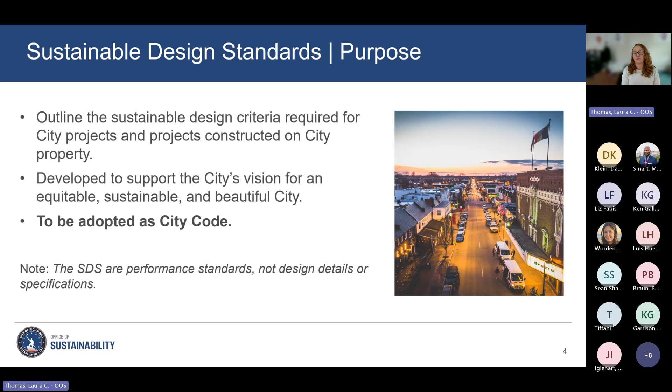Our office spearheaded RVA Green 2050, which is the city's climate equity action plan. And that document really comes out of Richmond 300 and is fully aligned with Richmond 300. So we spent a lot of time with RVA Green thinking about what an equitable climate future looks like for us. We've got our vision and our commitments through both of those documents. And so we really use those as the foundation for how we develop performance standards as it relates to sustainability and resilience.

If we're going to get to our greenhouse gas emissions goals, we've really got to move fast and far in achieving net zero facilities, for example, or ensuring we're maximizing our renewable energy installations, or reducing the amount of construction material, or recycling our construction material to a greater extent. So this is how we're developing these targets, and that leads us from that policy to that target, and then moving forward, we're looking at design.

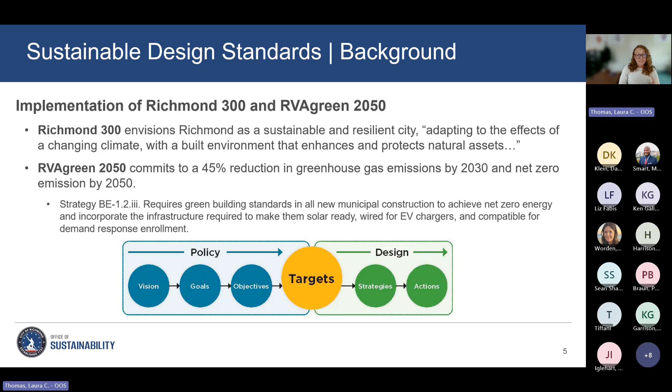So there's a question I see about applying to renovation or rehab projects or just new construction, and we do have that answer for you. Want to make sure we go through that. So specifically, this is for new buildings over 10,000 square feet. Thanks for the great setup on that, Margaret. So all new construction projects 10,000 square feet or above, these standards will apply.

It will also apply to major building renovations. So buildings that are over 20,000 square feet, if we replace 4 or more of any of these major systems, it's automatically going to kick into these standards. If it's 3 or less of these systems, it will not apply to major building renovations. It will apply to small project renovations between that 10,000 and 20,000 square foot.

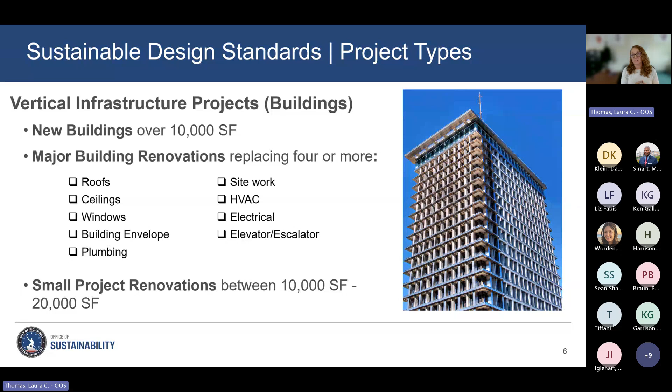It's also, so that's kind of our vertical construction application. If we think about horizontal infrastructure, that can mean a lot of different things. It's a little more intricate and complex to integrate horizontal construction projects into performance standards. So we'll share a little bit more about how that will come into play for some of our projects.

But generally, we can think about horizontal infrastructure projects in 4 different categories, or at least this is how the city has identified them. First, we're saying parks and community spaces. So automatically, any park or community space of $3.5 million or more will have to adhere to, we're going to be using Envision standards, the Envision standards that this document entails.

Right-of-way projects, any right-of-way project of $5 million or more. Same with outside the fence. So inside and outside the fence is kind of how we categorize various aspects of wastewater and stormwater construction. So how we're integrating those projects. So anything with those, that's the $5 million threshold. And then inside the fence, so like a wastewater treatment plant, you can't really certify a wastewater treatment plant as Envision necessarily, but if you're at $50 million or more, you're going to have to use that Envision framework.

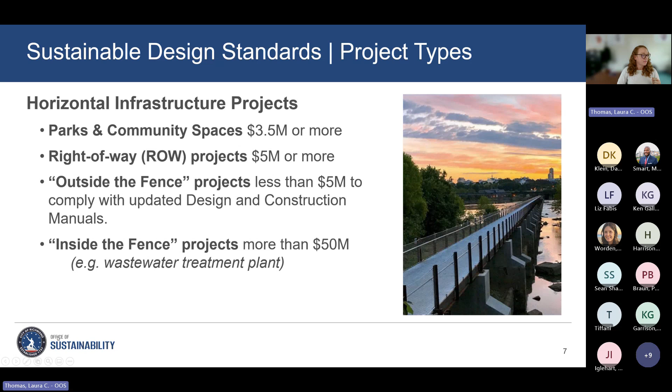So what are the exceptions? New buildings or renovation projects less than 10,000 square feet will not need to get certified. Emergency repairs won't need to get certified or look at these checklists, right? We've got an emergency out in the field from a public safety perspective. We really need to go out there and just fix things.

Utility maintenance and repair projects, so usually those are one-off and small to where having a whole checklist or getting certified isn't practical. And so in those cases, what we're doing is taking a look at our performance and best practices manuals internally as an organization and having conversations about those and how we make those more sustainable and resilient so that when we do go out, we're automatically incorporating some of those concepts rather than trying to focus on the small details and the teeny tiny projects. We're going to think about how we do those processes as a whole.

So small infrastructure projects are similar. Anything with less than 10,000 square feet of land disturbance tend to be things where you don't have that ability to do a big certification process or go through these long checklists if you're doing that small of a project. So again, just looking at our spec manuals and making sure those are updated more frequently. And then the small parks projects that are half acre in size or smaller will also be an exception.

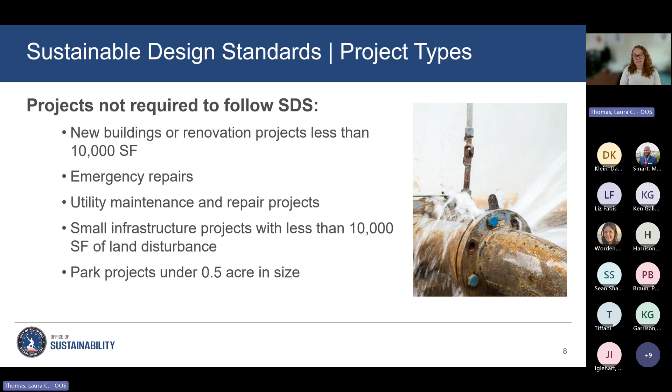So one thing that we think is really important is not just establishing performance standards, but changing the way we do projects. So what is the process in which we build and construct things here as a city? So we really wanted to focus on that process and think about the integrative process and how we incorporate that.

So at the very onset of a project, at the idea stage, you want to bring everyone to the table. Let's say we want to build a new building, a new department in the city, and they need a home, and we got to figure out where they go. Let's say we don't have any space at any of our current buildings, so we need to site a new facility somewhere within the city of Richmond.

At that phase, these standards require us to say, if we want to build on a new piece of land, then we need to engage with the community that is in that area or neighborhood. We need to ensure that's something they want, not just something we're placing somewhere within the city. Once we know where that site is, we need to bring all the stakeholders to the table to have conversations.

So we aren't just including project managers and designers, but our CMARs on board. Everybody from tip to tail is going to be in the conversation - our architects, our engineers, everyone on the construction side, the community as well. We're all engaging in the conversation simultaneously so we know how these systems and these complex built environment projects are coming together.

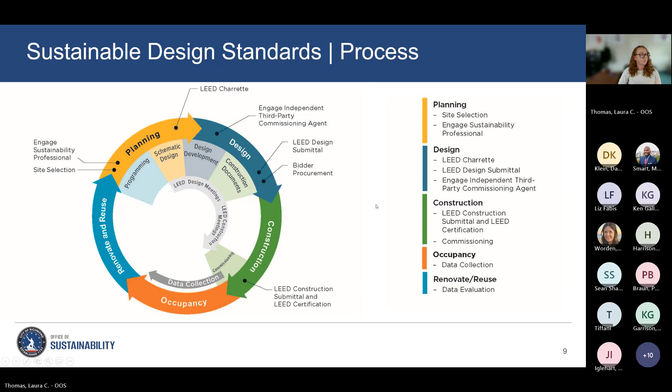Some of our outreach requirements, not on the technical side but still just as important, is reflecting the City of Richmond's equity agenda in this work. So really looking to empower the communities that have experienced these past injustices. That speaks to the land acknowledgement and the environmental justice side of things as well.

That outreach has to begin at the onset of conception rather than way far down the line when you've already spent money and time designing your project. So we want to make sure folks find out about these things early on and that they have the opportunity to participate in the decision-making process.

So next, we're going to look at some of the specific requirements that we have. These are more around LEED, so our vertical construction projects. Everything 10,000 square feet or more shall achieve LEED silver.

And we can always increase that in future iterations as we as a team get used to flexing this muscle around LEED and Envision - we'll get stronger at it, we'll get better at it. And if we update this document at a minimum every 5 years, we can look at increasing that silver rating. But we will require all of these projects getting LEED silver to achieve 20% of the location and transportation credits.

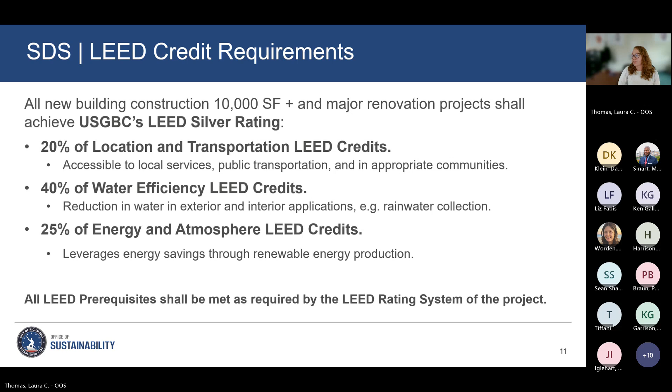We also are going to require that integrative process we spoke about to be incorporated into every project. Every new city facility will have EV charging stations. Every new project that is relocating will do a site assessment, and we are going to lean heavily into the energy and atmosphere requirement section for LEED as well.

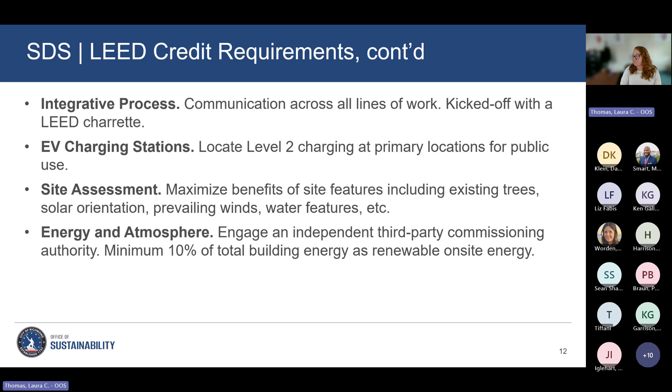And looking at that third-party commissioning and ensuring that 10% of total building energy is renewable on-site energy. We have additional requirements pushing us towards that net zero goal established in RVA Green 2050 as well, and we can look at that in a bit here. So those are on the LEED side.

Take a quick look at the Envision side. If you're familiar with it, the ISI's Envision framework will be used for all new horizontal infrastructure projects regardless of size.

Again, all projects will use LEED or Envision checklists. We shared earlier what the thresholds for actual certification are. That's $3.5 million or more for parks, $5 million or more for right-of-way, $50 million for inside the fence, and then outside the fence projects like repairing or replacing a stormwater pipe. Instead of focusing on the teeny pipe, we are going to go back and look at all the city design and spec manuals.

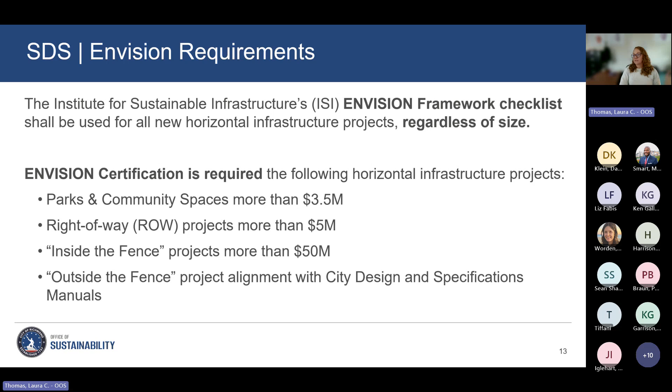So that was a lot of information. We're going to take a moment and pause, thinking about what we just shared. We understand why we're doing this, we understand how we got here, and we understand where different elements of LEED and Envision, and some things that go above and beyond in this checklist or these design standards, are going to be applicable.

So when you think about performance standards, I'd love for you all to share in the chat what kinds of elements you might want to see in this document. I want to see if maybe we already have some of those things included. For example, we shared the 10% renewable energy—do you want to see 100% renewable energy or net zero performance standards included here? Thinking about things like LED lighting and compliance with international dark sky standards, or what percentage of materials you want to see recycled during construction. Take a second, let's get a couple answers in the chat.

You can have elements related to stormwater or landscaping. A big one that comes up often is utilizing exclusively native plants, which we almost do. Ahead of the landscaping slides, I'll share that in addition to native plants, we want to allow some wiggle room, especially for larger species with long lifespans. We want to make sure they can adapt to and tolerate the increased impacts of climate change—increased heat, increased drought. When those trees are 100, 150 years old, we still want them to thrive in those increased conditions.

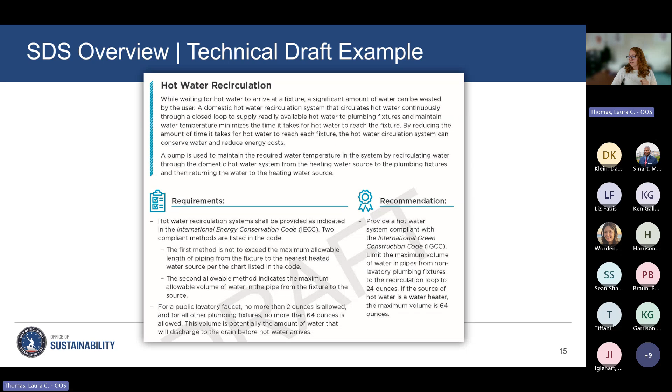The next one that we're going to go to is energy. So there are a lot of elements in the energy section. I highly encourage you all to go check that out in the Konveio link, and my team will pop that back in at this point. So if you haven't pulled that up, you can hop in and do that now.

But just an example in the energy section is the building envelope. So some general standards, but we want to make sure that every vertical construction exceeds minimum performance requirements by the amounts shown in this chart. And it depends on what kind of building it is. We ran a lovely net zero energy scenario modeler when designing and deciding what these are going to be.

Our consultant team, AECOM, who helped us create this document, they have a really great net zero modeler. And they took our performance thresholds, plugged them into their models based off of a warehouse, a dwelling unit, or an office and administrative unit, and helped us come up with these goals. So for example, if we're designing an office building, our exterior walls have to exceed minimum performance requirements by 15% or more.

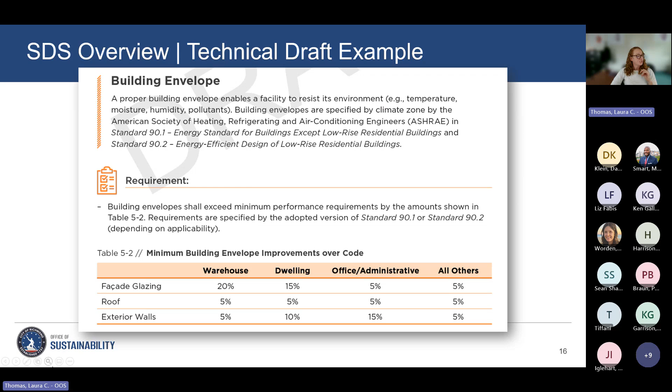There are plenty of other energy related things, as I mentioned. Another example here, thinking about resilience and resilience planning. Every facility is going to need to provide street-to-door ingress/egress routes for foot, wheelchair, and bicycle traffic, and have dedicated vehicle routes not interfering with pedestrian safety features. We also are asking recommendations to provide more than one access point for vehicles and bicycle pedestrian traffic, and to make sure that the walkways are connected to our trails, systems, and transit stops. Might not always be necessary, but is largely a default for most of our projects at this point.

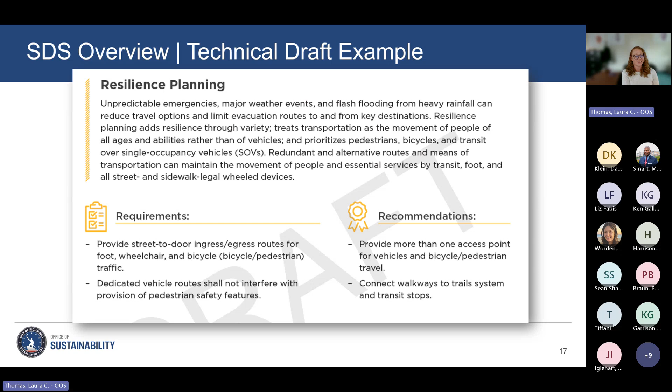Another one is thinking about flood control and stormwater. This is a really important one, more so in certain areas of our community than others. Our requirement and baseline for new projects is that they have to capture the first 1.25 inches of runoff from impervious surface on site for reuse or infiltration. And again, that's just a great example of how it provides flexibility while also promoting elements that we all love and want to see in our projects, like permeable pavement.

Some recommendations include promoting rainwater collection and reuse systems. Maybe that's rain barrels, maybe there's a gray water element as well, thinking about gray water incorporation. Thinking about flood prone areas and how to go above and beyond those. So a lot of flood control and stormwater considerations overall.

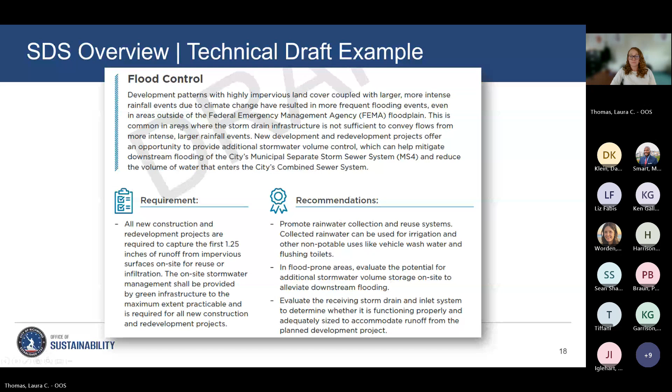Thinking about site planning and overall design, our requirements range from conducting a pre-design site analysis, including views, to ensuring that we do not remove healthy native heritage trees, period.

Recommendations, and most projects will be able to achieve this, is not to remove any healthy native trees at 14 inches diameter at breast height or larger. Other things include protecting non-invasive trees, including CRZs or critical root zones, and transplanting or salvaging native plant material, potentially off-site. So several things when it comes to site planning and design.

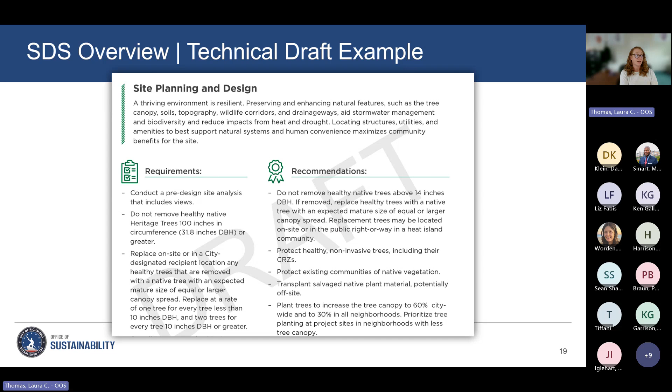We also want to think about overall wellness, right? So it's not just the built environment, but we're building the environment for people. We want to think about the wellness concepts that we incorporate. This is a great retention tool for the city, to be honest, and it lowers healthcare costs. So we want to make sure that we're requiring projects to complete a Fitwel certification checklist as part of the design of the interior spaces.

We want to make sure we include lactation, wellness, and prayer rooms, comfortable seating with dimming light, lockable doors, refrigeration, and provide daylight in appropriate spaces, or indirect lighting from windows and skylights. Some things we recommend include entryway systems at main entrances, sit-to-stand desks, integrating natural vegetation inside the structure and not just outside, providing noise reduction glazing, filtered water, and things of that nature.

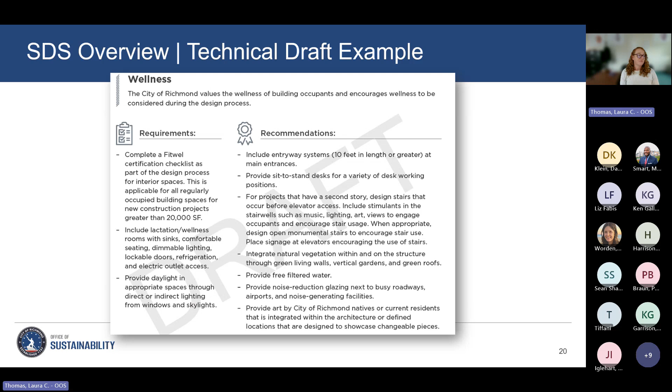So those were the primary categories. Again, we looked at indoor air quality, indoor water, energy, transportation, stormwater, site and landscaping, and the wellness and architecture category is included in that as well.

And where we're at in the process: we drafted this technical document that we're providing you all from September of 2022 to June of 2023. We've held many sessions with city team members. I've had over 100 team members comment and provide suggestions. So we've shown that initial phase was that community feedback, input, and visioning from Richmond 300 and RVA Green 2050.

Then we had the technical folks inside the organization respond to that and figure out how we can design performance standards that achieve those goals. We're developing a policy and figuring out how we want to integrate this, as we mentioned, into municipal code so that it has teeth. And here we are now in July of 2024.

Conducting our community engagement, this is our first session for this project today, geared a little bit more towards the technical side of things. We've also got community engagement sessions designed more broadly for community members, and those will lean more into the community benefit side of things, the community engagement process, and environmental justice concepts, looking at what folks like and maybe don't like in what we've proposed, so that we can ensure we're lifting those voices up in the community, especially for projects that require us to change or create a new location.

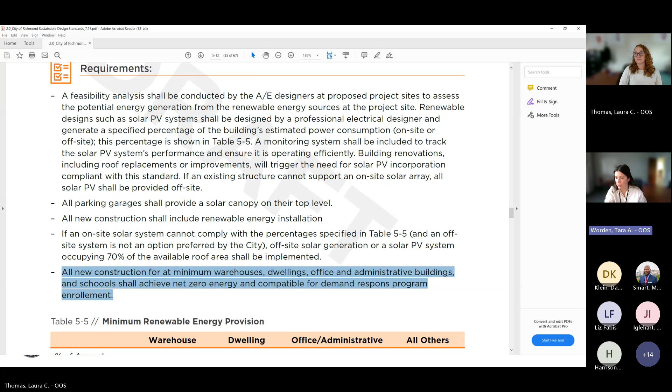Okay, I'll go to the next question in the chat, was from Peter Braun: seconding green infrastructure, stormwater best management practices required, green space and tree canopy minimums.

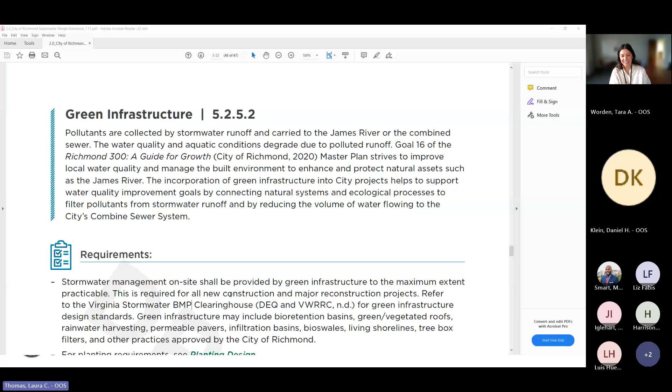Yes, absolutely. We do mention our BMPs in here several times. Let's see if I can pull up an example for us. I don't want to scroll if it gets that weird fuzzy content, so I'm trying to find it and share it with you all.

But we do talk about BMPs here. We do require that stormwater management on site shall be provided by green infrastructure to the maximum extent practicable. So it's not like, oh, let's design it and then figure out where we put this in - we're designing it as if this is everywhere and then we have to figure out how to take it out. And we certainly are referring folks to the Virginia Stormwater BMP Clearinghouse as a way to help consider that and integrate some of those things. So very good point.

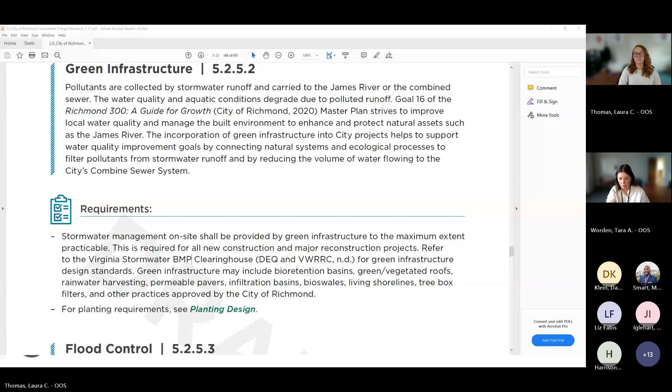And Tara, you are on mute.

Thank you, just scrolling down in the chat. I think we've noted some of these comments already. I tried to respond. So if you guys have these questions, these are absolutely wonderful questions - this is the feedback that we're looking for. If you want to utilize that Konveio link that has been popped in the chat and put some of these, like seconding the information that's in here, that only gives us better business case to roll this through to the council level and get the project adopted.

Scrolling. Yes, it will apply to schools. Okay, I think Luis has just put something in here: any requirements for recycling, construction waste management, LCA for embodied energy. I think that's maybe a couple of different portions of the document.

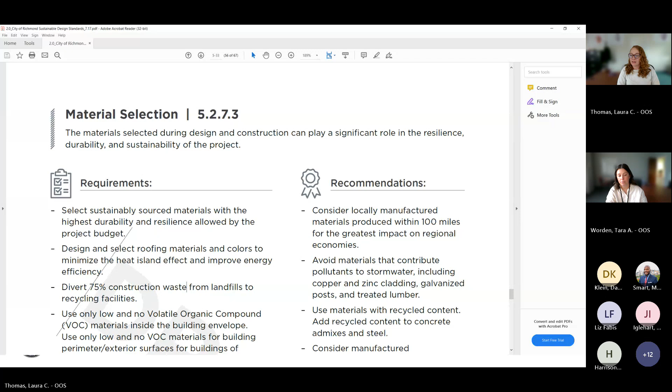Yeah, and the first one here is on construction waste. It's fairly ambitious - it is diverting 75% of construction waste from landfills to recycling facilities. So 75% diversion rate. And then LCA - one moment.

So while I'm trying to find where it is in this close to 70-page document, we do talk about lifetime embodied energy. We actually talk about embodied carbon as well, and it's not on the requirement side, it's on the recommended side. I think that's one of those concepts that involves a lot to get to accurate modeling, and that's a muscle we're going to need to learn how to flex a little bit better, and I think we're going to do better over time. There's language in there that I'm not finding at the moment, but I can follow up with you specifically, Luis, on that.

And then if we can think of better ways to make it easier for us. We can certainly put in our RFPs and our contracts that we're going to require the consultant to pay a third party to run the modeling, and we can do it that way. But that's typically going to be for your larger projects rather than doing it for the smaller projects. So I hope that answers it enough, Luis.

I don't know if you want to go back, because we tailored this presentation to the technical aspects of the document. There was a question, Monica had a comment that said projects are required to meaningfully engage with communities of project location. So if you want to touch on that process change within the way that projects are formed in the city, that may be helpful for folks on the call.

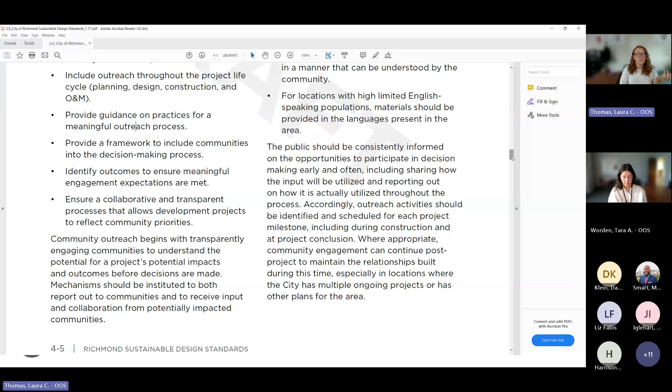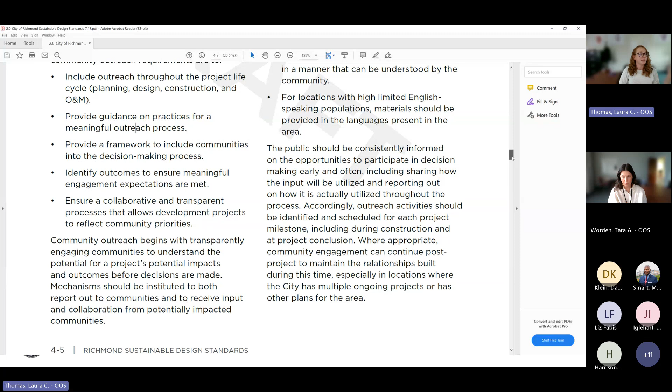We don't always get to decide. In government, especially in this mix between state and local, sometimes the state has authority and we don't get to say where a new building goes. Same with some of those other larger projects, but at least what we can do is share in a transparent manner who has decision-making authority and what we're trying to prioritize in that decision-making process. We also indicate that outreach should be conducted accessibly to achieve diverse engagements across race, income, age barriers, and other demographics. We need to, as a city and as a team, be reducing those barriers to community participation, such as limited English speaking abilities. So how are we ensuring we're providing the appropriate translation services?

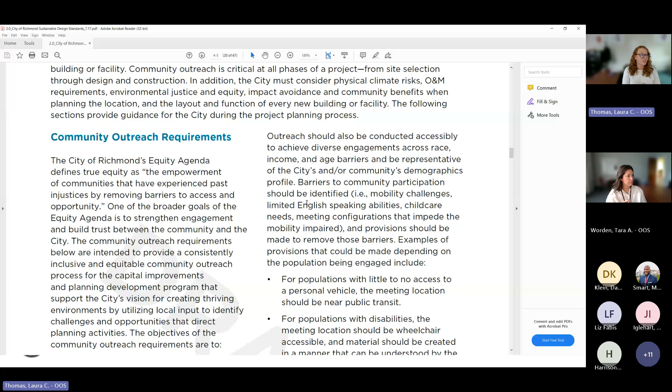And I think overall, one of the things that we outline in this document that's really important—we try to scroll to it really quickly. We also are thinking about things like the EJ screen and the Climate Equity Index when we think about site selection. I'm trying to find it—Tara and Mike, maybe if you can help point me to where in the document we're setting up for the community benefits element. It's page 27, 5-1.1. There we go, thank you.

So we are also outlining—we're not doing this literally in this document, but we're setting it up for us—that we have to think about how we're doing community benefits agreements for all of our new facilities. So how are we upholding inclusiveness, transparency, and coalition building so that we can make sure we're staying in alignment with RVA Green processes and Richmond 300 processes, as well as efficiency.

So we're saying that the city will be creating standard templates for community benefits agreements. And I say that in maybe a lowercase version because per state enabling language, we're actually not allowed to do community benefits agreements. However, if you look at, say, the development agreement for the Diamond District, that's a great example of where we did include community benefits, just without maybe that term, in a way that still achieves the goals but doesn't conflict with any of the state regulations or lack of enabling language.

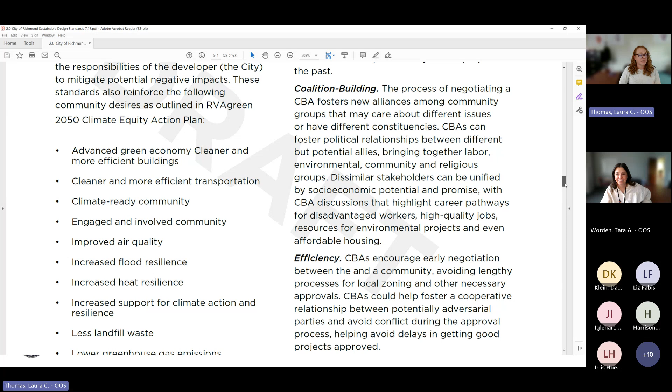This document does outline that we need to continue to advance in this area, and that we will be creating templates reflective of different areas of our community. We recognize the West End is not the North Side, it's not the East End, it's not the South Side, and that different areas are going to need and want different types of community benefits. This part is really important, and we're excited to see where this goes. Tara and Mike and other folks on the team will be working on those moving forward.

Laura, it seems like there's a couple of questions that came from Giles and Peter around how this document will be enforced or communicated to other city staff, either at the UDC or CPC. You want to touch on that?

Yeah, absolutely. City leadership has been involved in this project for close to a year and a half, whether that be some of the deputy chief administrative officers of operations and planning, or other directors on the project management team. Our planning director and assistant planning director who oversee UDC and planning commission, or our stormwater engineers, all across the organization have been vetting this the entire time. So they helped to build this tool, whether it's the PMs on the technical side or somebody focused more on the community outreach side of things.

Everyone's aware of this. Everyone knows this is going to become municipal code. We're going to be doing training for folks in the fall, so they'll be more empowered to follow through on this. We're also going to be including language, working with procurement, so that we can include language in our RFPs that helps us adhere to these and helps enforce this. So how are we utilizing our consultant teams effectively to help us achieve these things?